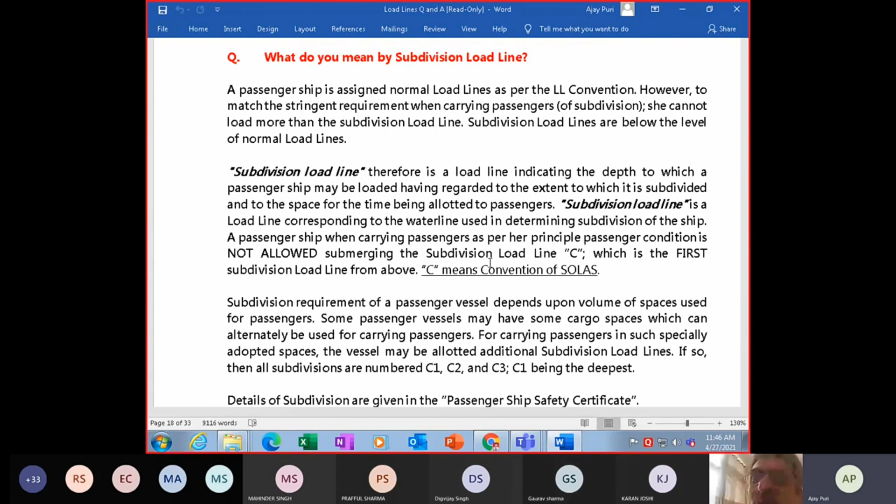So a passenger ship, when carrying passengers as per principal passenger conditions, is not allowed to submerge its subdivision load line C. We're not talking of your load line mark, but the subdivision mark - you can't submerge it. C is the first subdivision load line from above, below that will come C1, C2, C3. At the top will be C, below it C1, C2, C3. Let me first show you what it looks like.

So whenever the question comes, you have to draw the diagram also. This diagram - compared to this, it's not that good a diagram. There's another diagram which I'll show you.

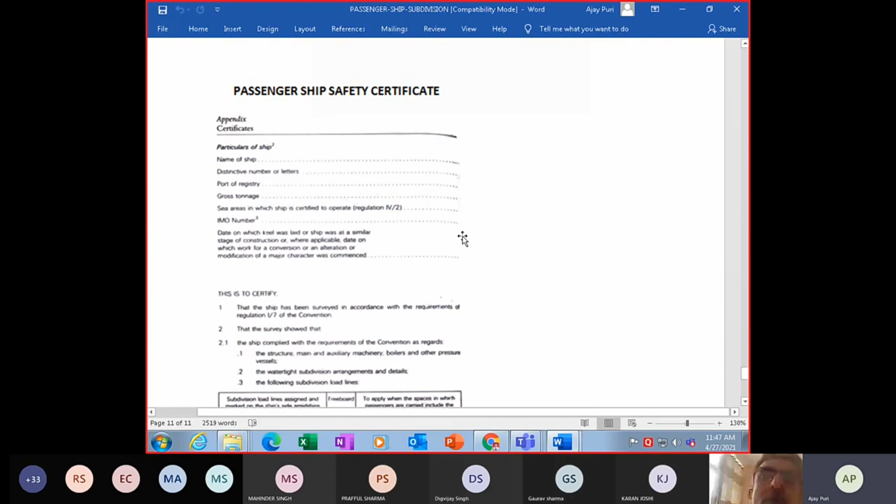These C1, C2 and C - so this is your passenger ship safety certificate basis, that this will be marked C1, C2, C3, subdivision load lines. All this has been sent to you in your notes.

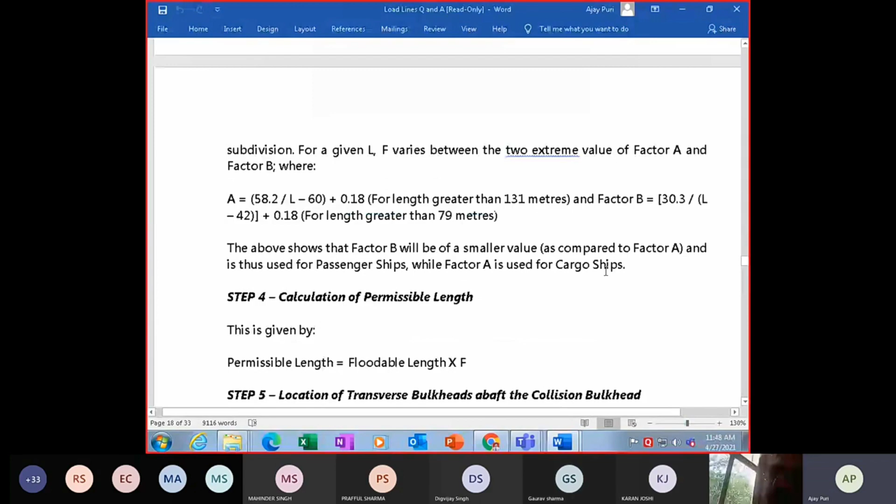Now we come to this and then I'll come back to the other part also. First let me explain in detail how to calculate this.

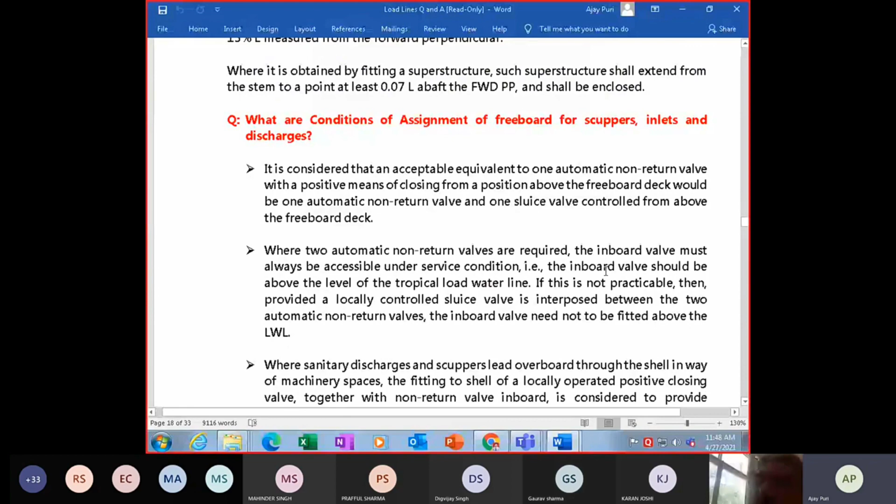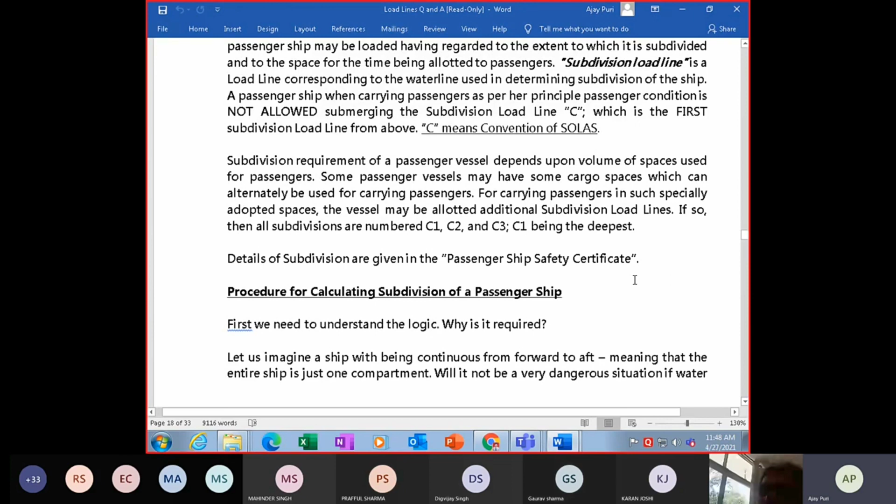So subdivision requirement for passenger ship depends on the volume of space used for passengers. Some passenger vessels may carry cargo spaces which can alternatively be used for carrying passengers. So when you're carrying passengers in such specially adapted spaces, the vessel will be allotted an additional subdivision load line. These subdivision load lines will be C1, C2, C3, and C1 will be the deepest. The details will be given in your passenger ship safety certificate, which I've shown you.

Now, how do you calculate your subdivision for a passenger ship? How many subdivisions should there be? How do you calculate it?

So first you have to understand why it is required. Why is subdivision needed? So that your progressive flooding can be reduced. You have subdivisions - a chemical tanker has 40 tanks, so that means the sinking will be much slower as compared to a bulk carrier which has got 5 holds. Because if the number of subdivisions is less, then the ship is going to sink fast.

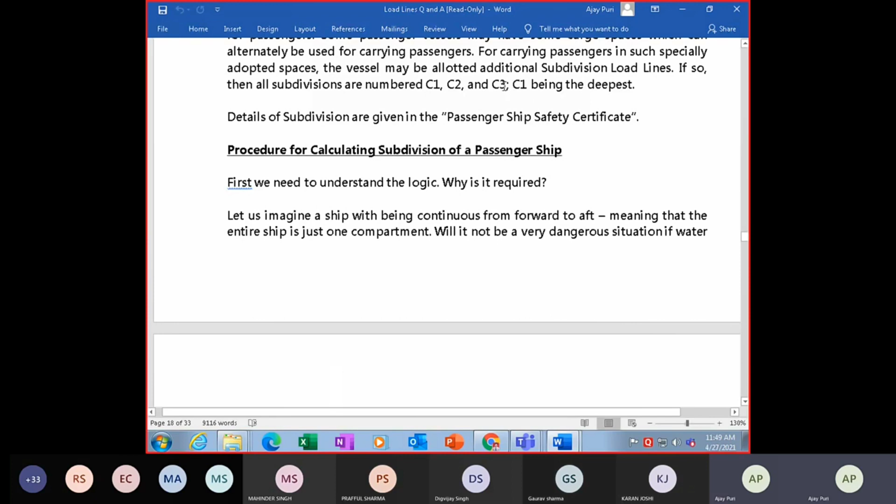So let us imagine a ship which is continuous forward and aft, meaning the entire ship has got only one compartment. Will it not be a dangerous situation if water is entering the hull? One can imagine the loss of stability due to large free surface effect there.

Now, to increase stability, let us divide the ship into two compartments with one watertight bulkhead separating them. So if water was to enter one of the two compartments, the other compartment would continue to provide reserve buoyancy. This means the division of the hull into watertight compartments increases the level of safety, and more compartments means more factor of safety. So here the concept of factor of safety comes into play.

On passenger ships, this level of safety has to be maximum as compared to cargo ships, because the passengers will have more importance. They are more to be concerned with as compared with your cargo.

You can't throw passengers overboard, but you can jettison cargo. You can't jettison passengers in any emergency. Master has the right to jettison cargo if he thinks so, to save the ship, but he can't jettison passengers. So the passenger ship safety is utmost.

So a passenger ship is subdivided into a number of compartments. The number of compartments has to be increased logically. Otherwise, a ship will be like a matchbox which can sink immediately. So the essence of subdivision of a passenger ship is to calculate the number of compartments for its length.

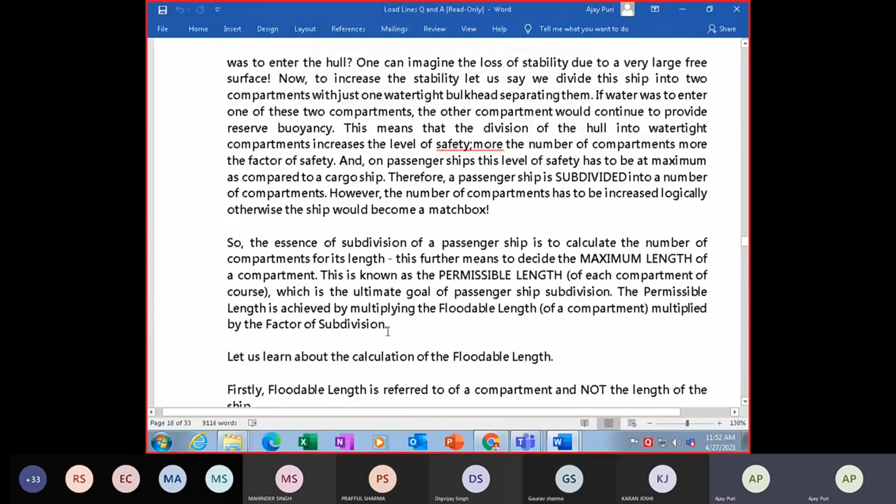Now, how do you find floodable length? Because permissible length, as you know, is achieved by multiplying floodable length by factor of subdivision. So let us learn about the calculation of floodable length.

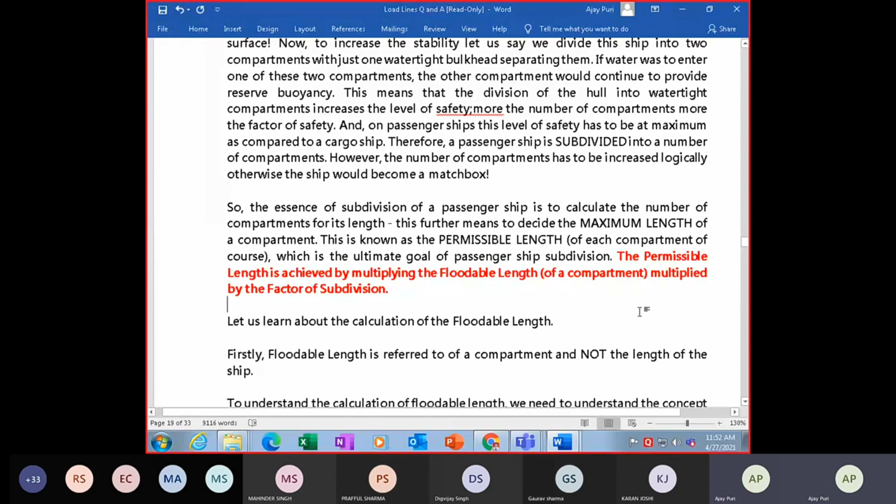Now, floodable length is not the length of any compartment as such, nor is it the length of the ship itself. First you have to understand what is the margin line.

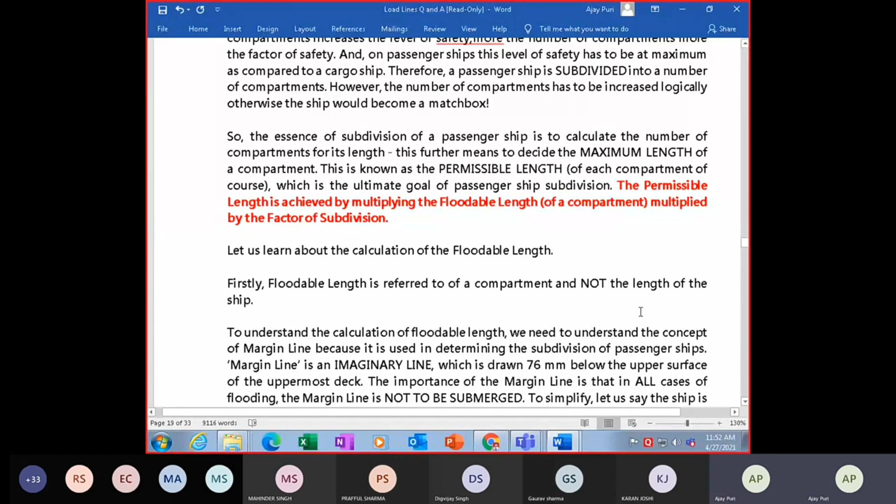Margin line is basically an imaginary line which is 76 millimeters below your bulkhead deck. In any condition of stability, your margin line is not to be submerged. So margin line is that imaginary line all around the ship, below your uppermost continuous deck, to prevent sinking or progressive flooding.

That is 76 mm below, because if it comes above, that means water will enter the openings on the deck. So why is it known as a margin line? It is a margin of safety. That line is a margin of safety.

Let me explain with a diagram here how this is the margin line, and why we consider it the margin line. Then we will come to floodable length, and I'll explain with the diagram what floodable length is. Just by reading out, you will not understand, so let me explain by diagram.

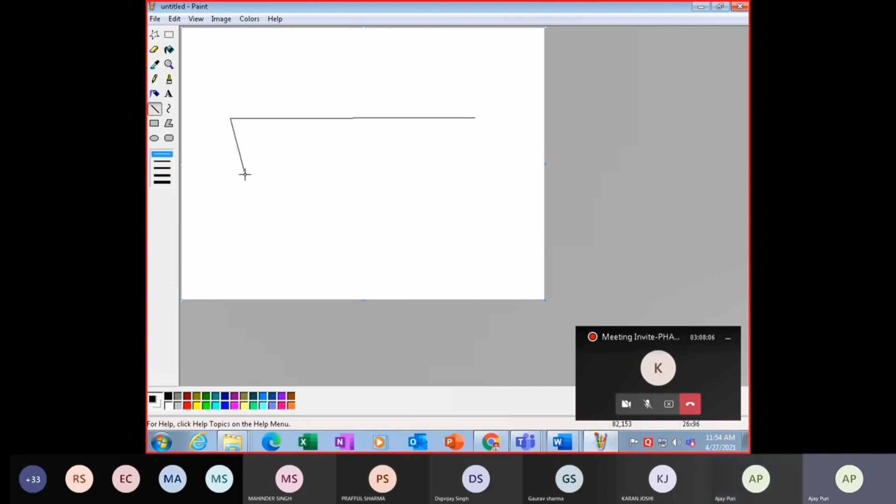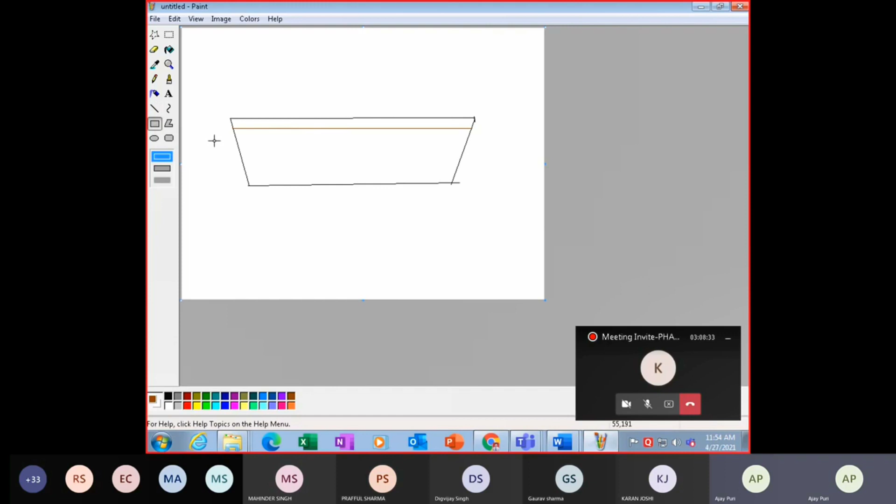Now suppose this is the ship here. If we consider this in any other color, this is the margin line, which is 76 millimeters below your uppermost continuous deck. So this is your margin line. That means in any condition of stability, you should not immerse your margin line.

So now suppose two of your compartments are flooded, you cannot submerge your margin line, which is this line. You can't submerge this margin line. So in any condition of stability, you can't submerge this margin line.

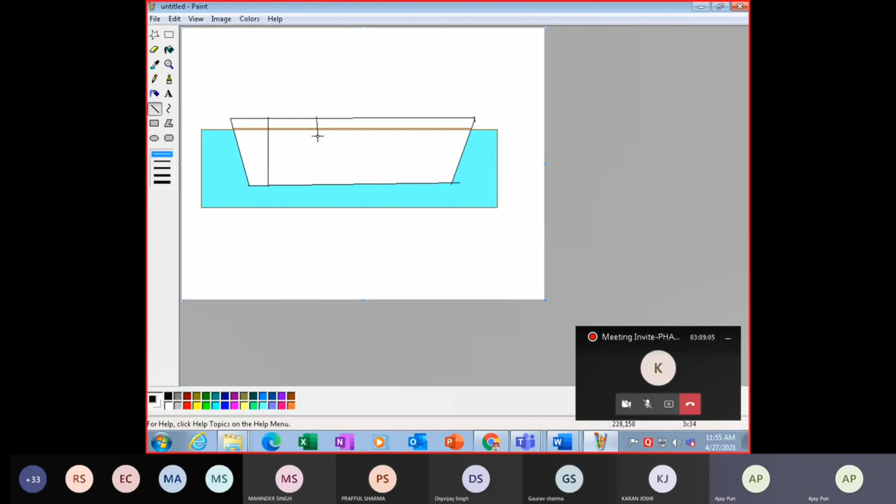So suppose we have made subdivisions like this: one division here, watertight compartment, this is watertight bulkhead here, watertight bulkhead here, watertight bulkhead here, watertight bulkhead here. Now we'll come to floodable length, and from this we'll explain what is floodable length. I'm just leaving this diagram here.

This is your margin line. The vessel should not submerge this margin line in any condition, even if one compartment or two compartments are flooded, this should not submerge. Now we come back to the definition of floodable length. I'll explain with this diagram.

Now to understand the calculation of floodable length, we have to understand the concept of margin line, because it is used for determining the subdivision of passenger ships. So margin line is an imaginary line which is drawn 76 mm below the upper surface of your uppermost deck. The importance of margin line is that in all conditions of flooding, the margin line is not to be submerged.

So this is the main concept, that the margin line cannot be submerged in any condition of flooding. You can't have the margin line submerged, otherwise your ship is going to sink. Now, why is it called a margin line? Because this is the uppermost continuous deck. If I don't have a factor of safety here, then water is going to enter your compartments and sink the ship. So this is a margin of safety, and that's why this line is known as the margin line.

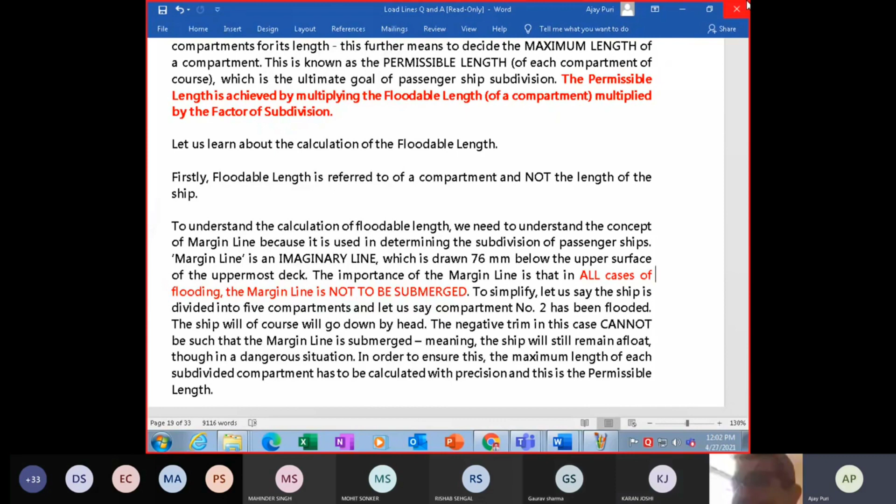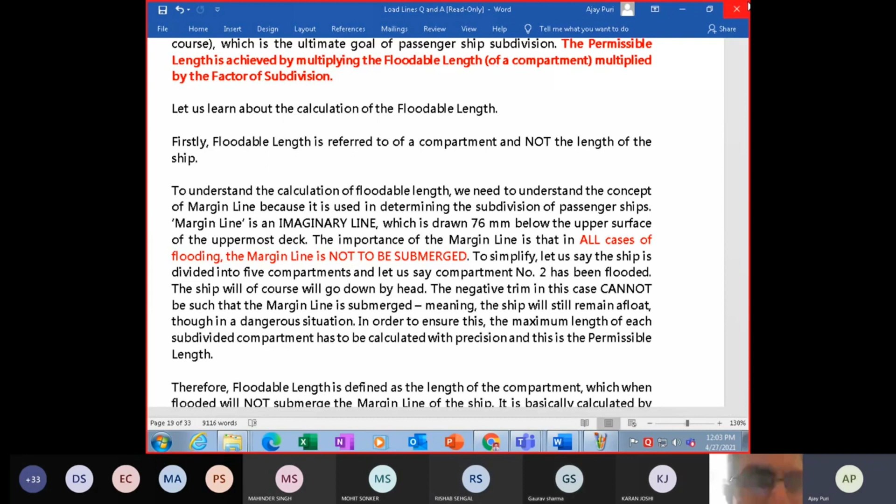सर ये चलो तो फिर बताओ आगे पेपर होंगे कि नहीं होंगे सर। क्या होंगे? पेपर होंगे, क्यों नहीं होंगे, लेकिन हाँ कोरोना का चक्कर अभी हो रहा है, अभी तो होंगे नहीं, अभी सवाल नहीं उठता। तो नोटिस होगा। जो नोटिस आया उसमें बोला कि फर्दर नोटिस तक अब बार बार आपको साइट देखते रहो डीजी की। तो सर आपको लगता है तो होंगे सर?

ऐसा है कि जब तक पूरा वैक्सीनेशन नहीं होगा तब तक तो रिटन नहीं होगा, और ओरल भी नहीं होगा, क्योंकि अभी वेव आ गया तो फिर रुक गया सब। पहले कम हो गए था, वेव आ गया, 3.5 लाख हो रहा है, सो ऑफ कोर्स दे आर गोइंग टू स्टॉप एवरीथिंग ना।

तो शिप पे जाना ही सही है सर फिर तो। वैक्सीनेशन तो साल भर पूरा नहीं होगा। देखो टाइम लगेगा, क्योंकि वैक्सीन इतना है नहीं ना, बिकॉज यूएस ने प्रोक्योर करके बैठ गया सारा, 70 मिलियन से ज्यादा तो वो लेके बैठ गया, और वो इंडिया को कौन सा देगा? जो वो रिजेक्ट कर रहा है वो इंडिया को दे देगा।

अस्त्रा वाला जो रिजेक्टेड है वो इंडिया को देगा, और इंडिया रिजेक्टेड माल चलाएगा सब पे, और क्या। और फिर सबको कोरोना होगा, और क्या, जो बच गए वो भी हो जाएगा कोरोना। जो लगवाएगा उसको कोरोना हो जाएगा, और क्या।

चलो पढ़ाई करते हैं यार, वो कोरोना कोरोना देख के तो मुश्किल हो जाता है, इसलिए साइड छोड़ दो उसकी, पढ़ाई करो बस।

So margin line basically we can't submerge. If the margin line gets submerged, the probability of sinking becomes more. So let us say the ship is divided into 5 compartments, and let's say compartment number 2 is flooded. The ship will go down by head.

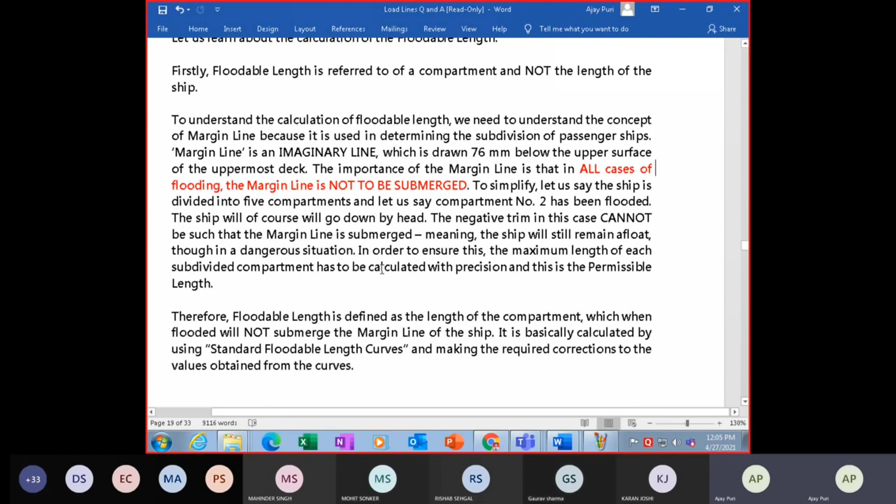So with the negative trim, you cannot have the margin line submerged. So that means your ship is going to float. However, the dangerous situation, in order to this, will be dangerous. So in order to ensure that, the maximum length of each subdivided compartment has to be calculated with precision, you have to know the permissible length.

So now what is your floodable length? Floodable length is defined as the length of the compartment which, when flooded, will not submerge the margin line of the ship. So here you have to calculate by standard floodable length curves, and you require to make your corrections from the value of the curve. So this will be in your stability, the standard floodable length curves you have to require for making your floodable length calculation.

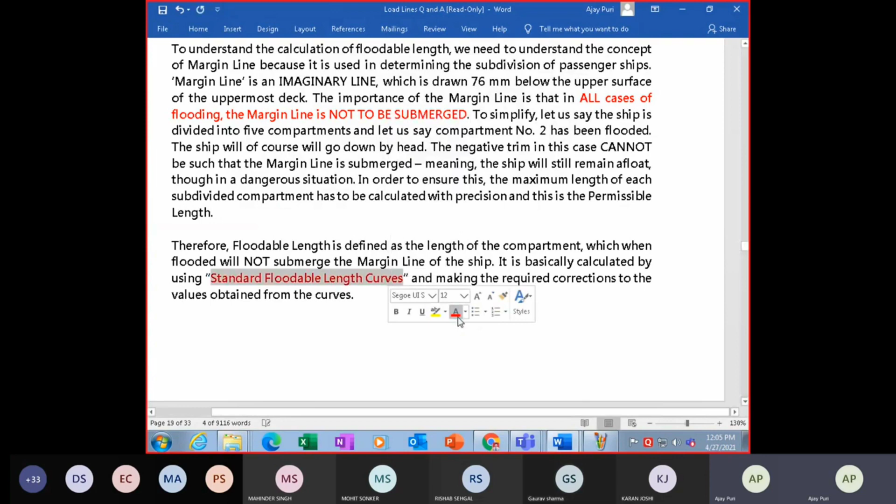अब इसको जरा explain करते हैं diagram से, कैसे होता है, why and how your floodable length is calculated. Now if you see this, इसको मिटा देते हैं हम, and now we come to what is the floodable length, how your margin line is not to be submerged, कौन सा length है जहां वो submerged नहीं हो रहा।

Suppose the ship has gone down by head. I suppose your sea is like this box, and the ship has gone down, gone down by head now like this.

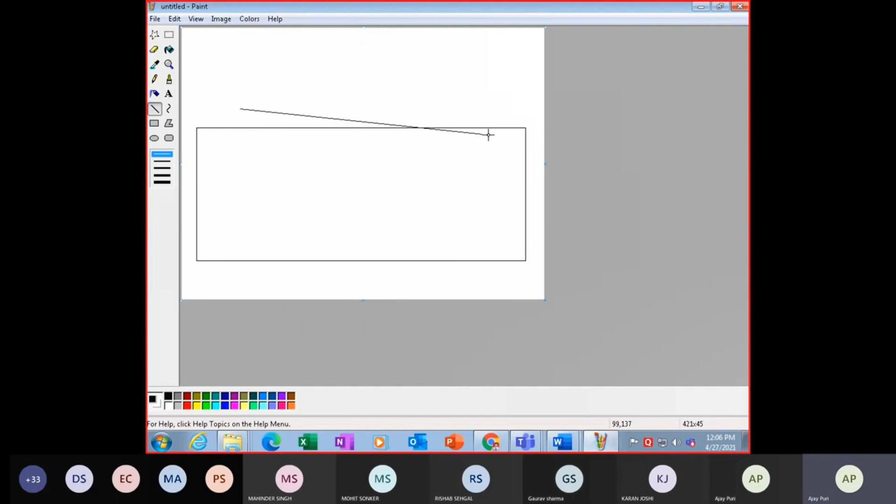This is a fictitious example I'm making to explain the concept. Now this is your margin line, okay?

Now what is the floodable length? The floodable length is where your margin line should not submerge, but here it did submerge. So suppose a floodable length is without submerging your margin line. Now this margin line submerged, if it doesn't submerge, whatever is left, that is the floodable length. So suppose this is a compartment, the floodable length is this much, which will not submerge the margin line. That is the floodable length, because you're calculating what is the permissible length, basically what is the length of compartment. But floodable length is where your margin line will not submerge.

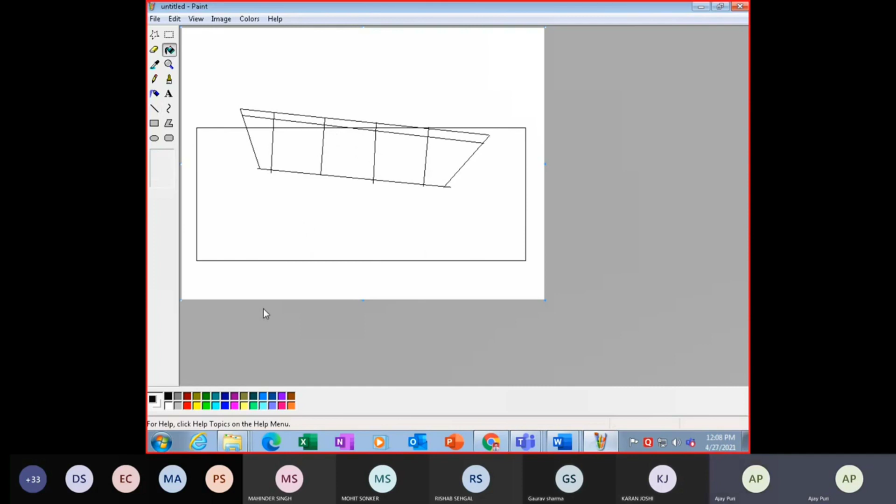Now in this compartment is flooded, this section which is left which is not submerging your margin line, that is your floodable length. This is your floodable length. So in case your compartment is flooded, this section is not being immersed into the water, that is your margin line is not getting immersed in this section, that is your floodable length.

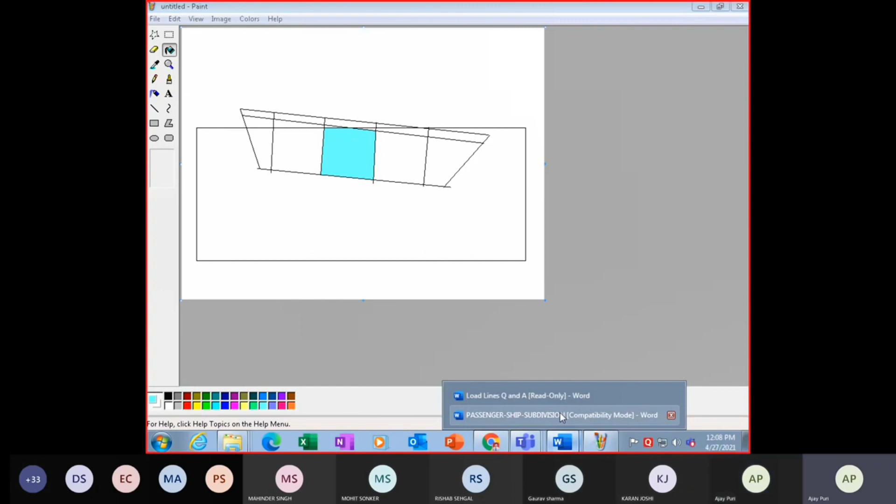So the floodable length is defined as the length of the compartment which will not submerge the margin line of the ship. So how much section is there which does not submerge the margin line, that is the length of compartment. And you will calculate this with your standard floodable length curves which are given in your stability booklet.

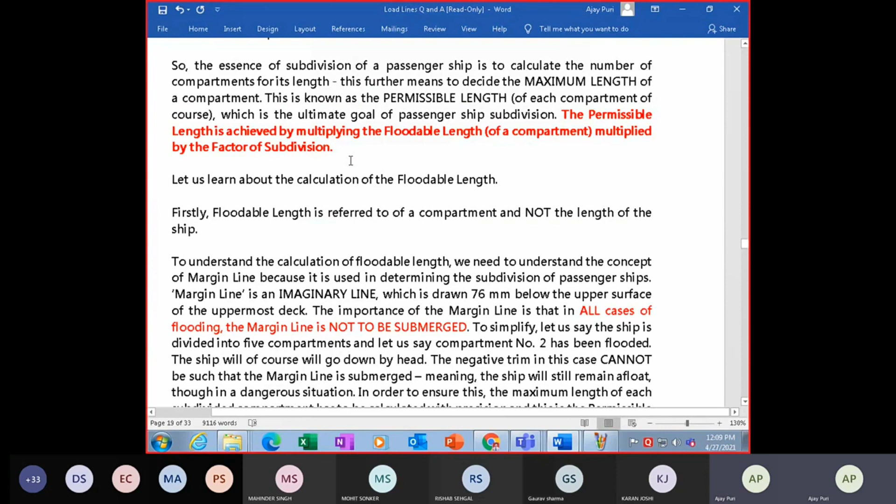And what will be the permissible length? So permissible length will be floodable length of a compartment multiplied by factor of subdivision. And floodable length is the length of compartment which when flooded will not submerge the margin line of ship. So if we made the compartment smaller, that will be the length of compartment which is not flooding, or which is not submerging the margin line.

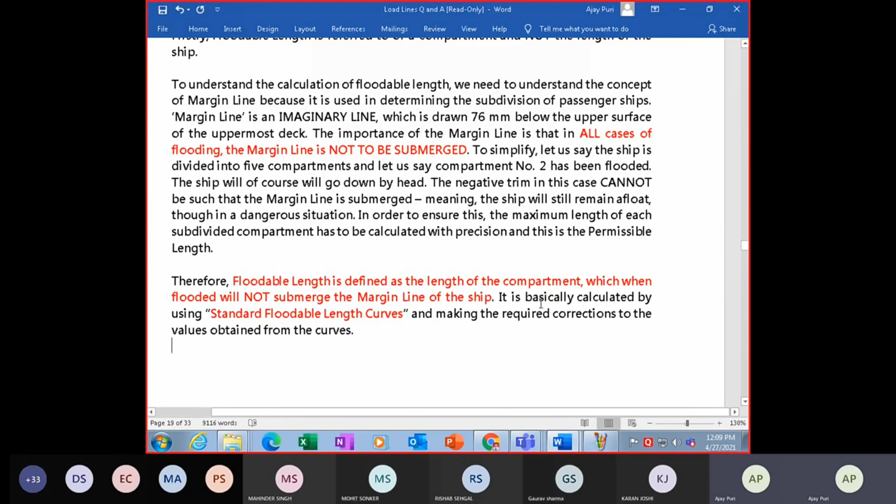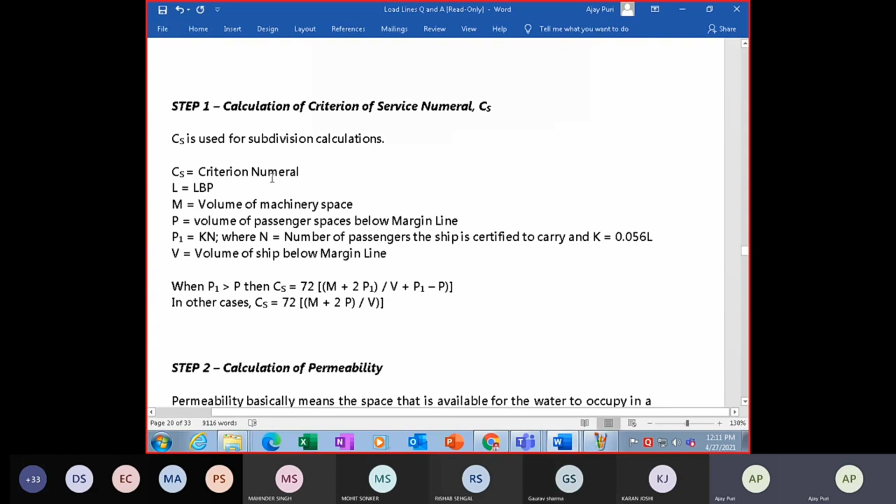In all other cases, when P1 is not greater than P or equal to P, so where P1 is less than or equal to P, then CS is equal to M plus 2P divided by V, because P1 is less than or equal to P, so we have to remove P1 there. So this formula you have to see for CS, that is your criterion for subdivision calculation, that is your criterion numeral.

Now, how do you calculate permeability of a compartment? So permeability is what? Let's highlight its definition. Permeability is a space that is available for water to occupy when your compartment is flooding. So we take the engine room's space permeability as 85% because 15% is occupied by the machinery. So the water that will enter will be 85%.

So for instance, the permeability of machinery space is taken as 85. This means in case of flooding of machinery space, maximum 85% of volume of the space will be taken by water, and the remaining 15% will be occupied by the machinery. So for convenience, a uniform average permeability or UAP is used for each of the following sections of hull. For your machinery space, uniform average permeability is 85 plus 10 into A minus C divided by V.

A is equal to volume of passengers below the margin line but within your machinery space. C is the volume of space below tween deck used for cargo, but within machinery space, because we are calculating the permeability of machinery space. So I have a uniform average permeability basis for machinery spaces, and V is the total volume of machinery space below margin line. So UAP is equal to 85 plus 10 into A minus C divided by V.

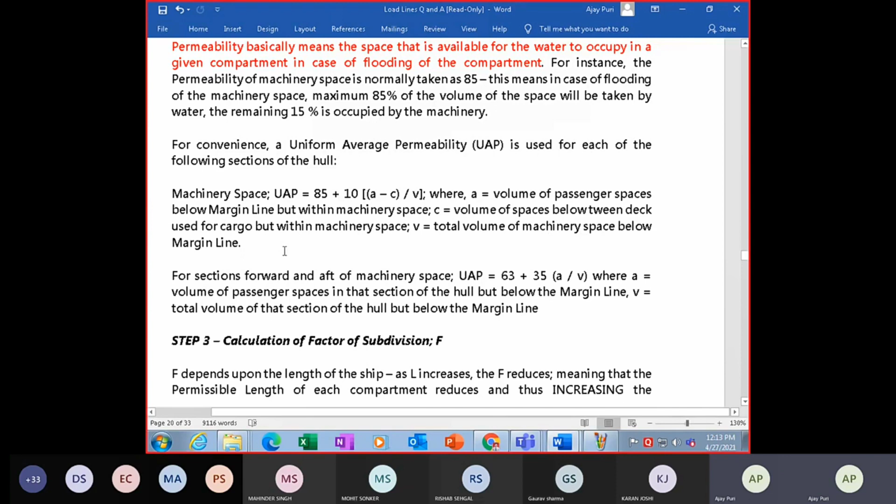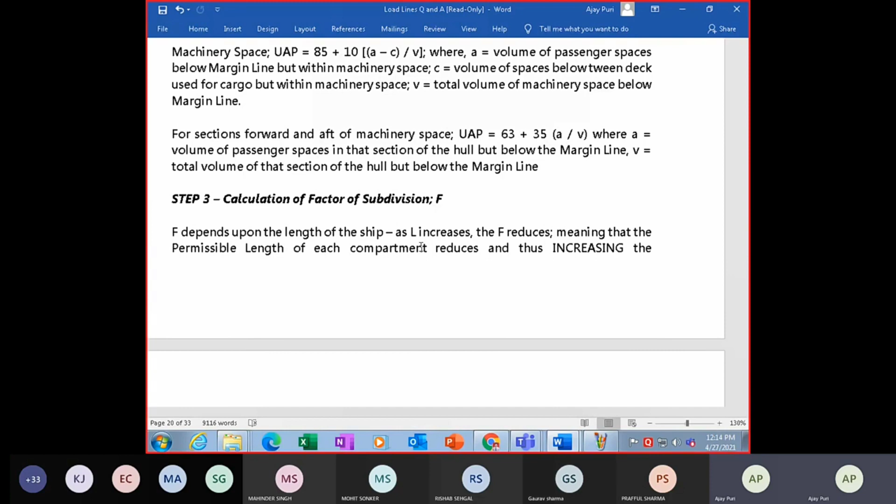Now for calculation of factor of subdivision: if the length of the ship is increased, the factor of subdivision reduces. That means the permissible length of each compartment will reduce because your number of subdivisions is increasing. So the permissible length of each compartment will reduce, and that will increase your subdivision. So the number of subdivisions will increase based on length, meaning the permissible length of compartment will decrease.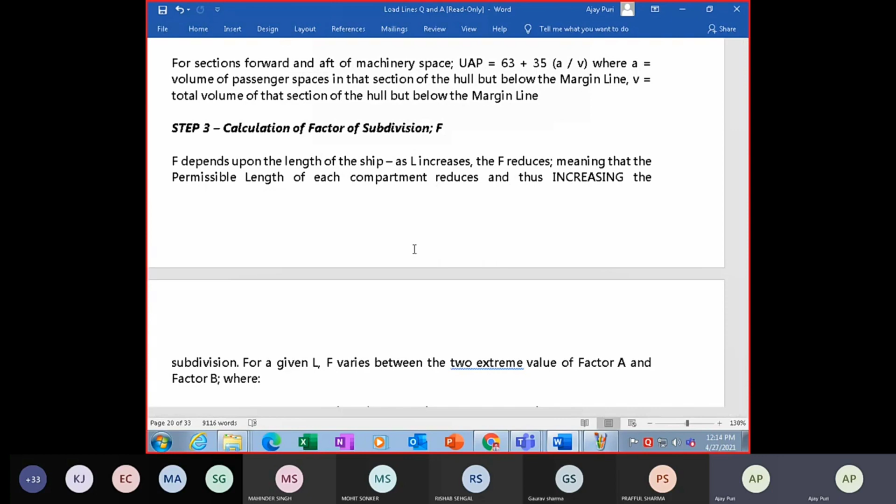So your factor of subdivision depends between two extremes, factor A and factor B. Factor A is 58.2 divided by L minus 60, plus 0.18, for lengths greater than 131 meters. Factor B is 30.3 divided by L minus 42, plus 0.18, for lengths greater than 79 meters.

Factor B will be of smaller value as compared to factor A, and therefore it is used for passenger ships, while factor A is used for cargo ships. So this factor is used for cargo ships, and factor B is used for passenger ships. This is cargo ship, this is passenger ship, because this is a smaller value as compared to A.

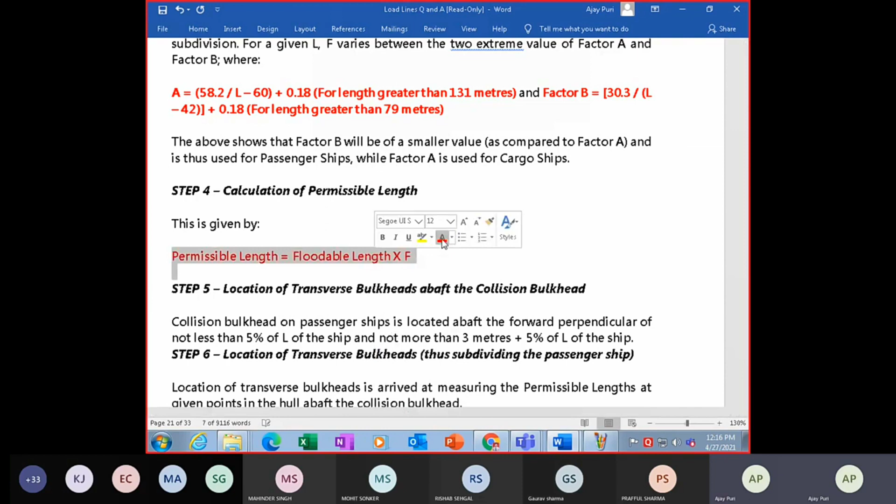Now, how do you calculate your permissible length? Permissible length is floodable length into F, the factor of subdivision. So you have to see where your transverse bulkhead is abaft your collision bulkhead. The collision bulkhead on a passenger ship is located abaft the forward perpendicular, not less than 5% of the ship's length, not more than 3 meters plus 5% of L of the ship.

On other ships, it is 5 to 7.5% of the length of the ship, but on a passenger ship it is not less than 5% length of the ship and not more than 3 plus 5% of length of the ship.

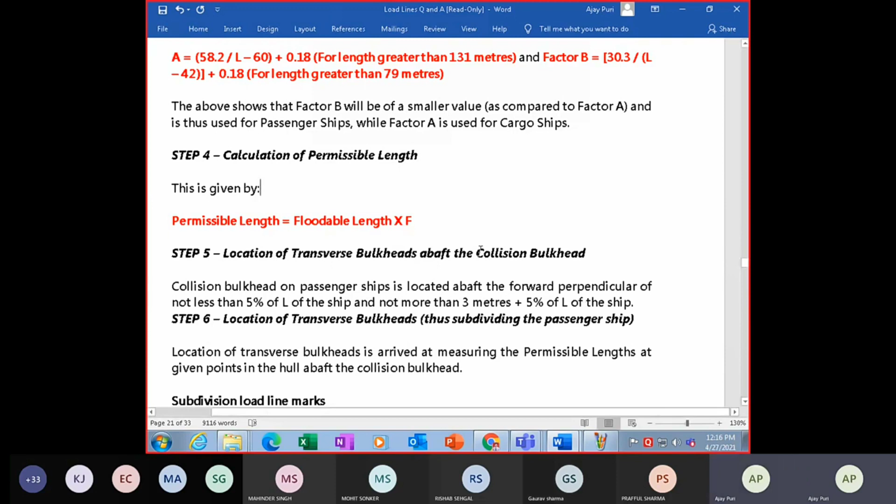The location of the transverse bulkhead dividing a passenger ship is arrived at by measuring your permissible length at given points on the hull abaft your collision bulkhead. So where are your transverse bulkheads located? That will be based on your permissible length aft of your forward collision bulkhead.

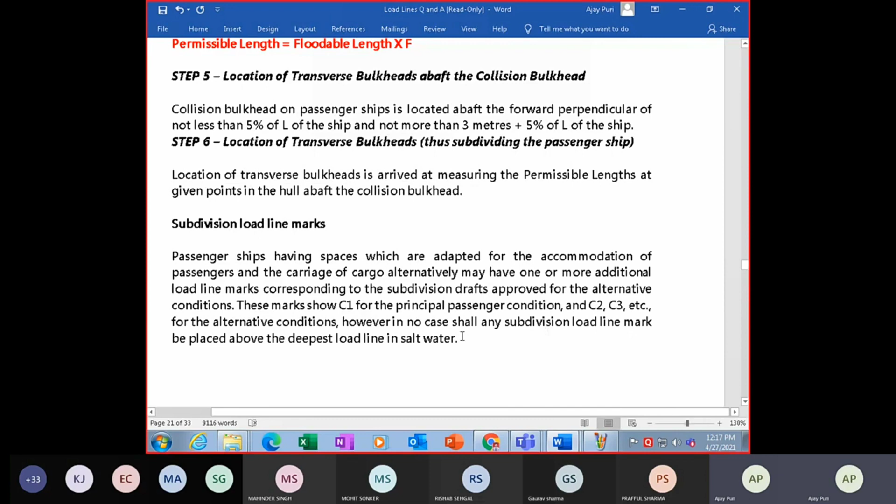So passenger ships have spaces adapted for accommodation of passengers and carriage of cargo, and may alternatively have one or more additional load line marks corresponding to subdivision draft approved for alternative conditions. So C1 is for the principal passenger ship condition, while C2, C3 are alternative conditions. However, in no case shall any subdivision load line be placed above the deepest load line in salt water - they should all be below that. So C1 to C2 will be below your winter load line mark. So that is your subdivision.

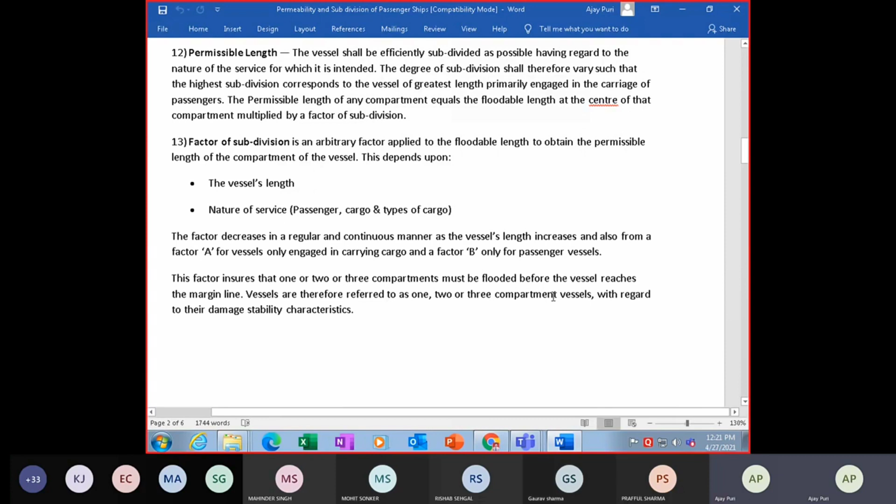So factor of subdivision depends on the ship's length and nature of service. The factor decreases in a regular and continuous manner as the vessel's length increases, and also from a factor A for vessels engaged in carrying cargo and factor B for passenger vessels. The factor ensures that one, two or three compartments must be flooded before the vessel reaches the margin line, and the vessel will therefore be referred to as a one, two or three compartment vessel with regards to damage stability characteristics.

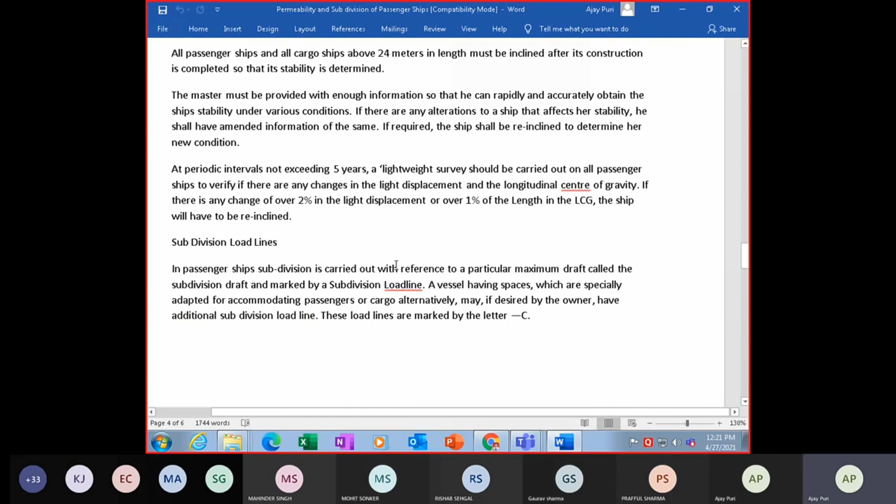So C1 is principally for passenger carriers, C2 is passengers in tween decks, and C3 is for lower deck carrier. Details of the load lines are recorded in the passenger ship safety certificate, together with the spaces used alternatively for passengers or cargo.

So the deepest subdivision mark cannot be above the deepest salt water load line. If, however, your subdivision line is above the appropriate international load line for a particular locality and season. If it is there, the international load lines will apply, not C1 C2. At no stage in salt water should the appropriate subdivision load line be submerged.

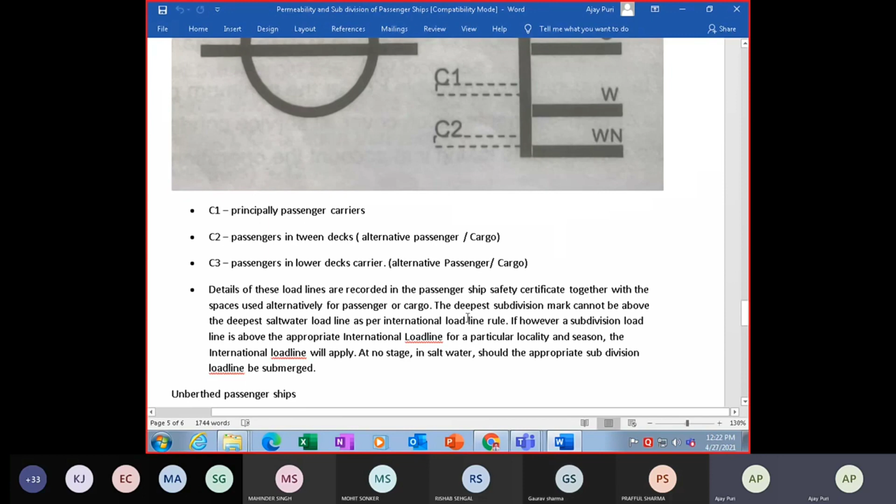अब इधर में स्पेशल ट्रेड के बारे में, एक और आपके D1 D2 भी आया था। during your unberthed passengers who didn't stay in berths but stayed on deck, for them they had D1, D2 and D3 for Hajj pilgrims, and these had greater freeboard than C lines.

So these were known as special trade passenger vessels. So in special trade passenger vessels, you had D1 D2 D3 which had more freeboard than your C1 C2 C3. So during the Shimla Convention in 1931, due attention was given to special trade passenger vessels

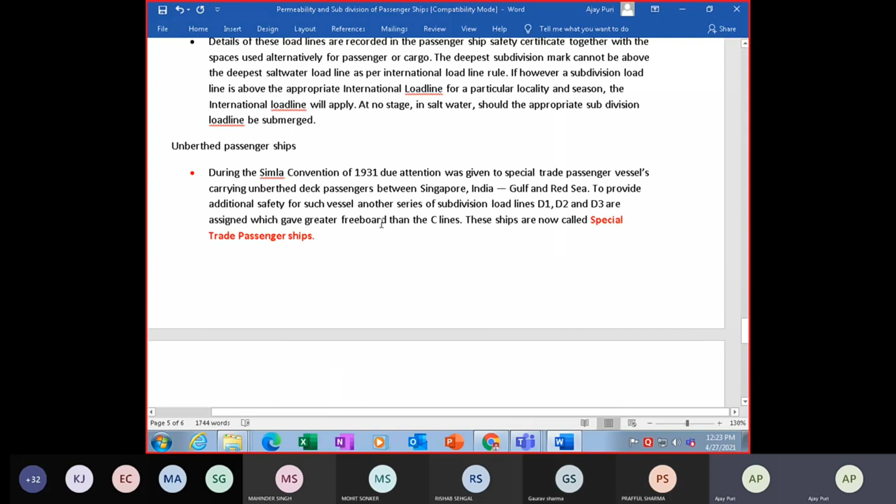carrying unberthed deck passengers between Singapore, India, Gulf and Red Sea, and to provide additional safety of these vessels, another set of subdivision load lines were there, which were D1, D2, D3, which were assigned to give a greater freeboard than the C lines. So these were for special trade passenger vessels.

यही आपको बताना था उनके लिए क्या है। That is for unberthed passenger ships.

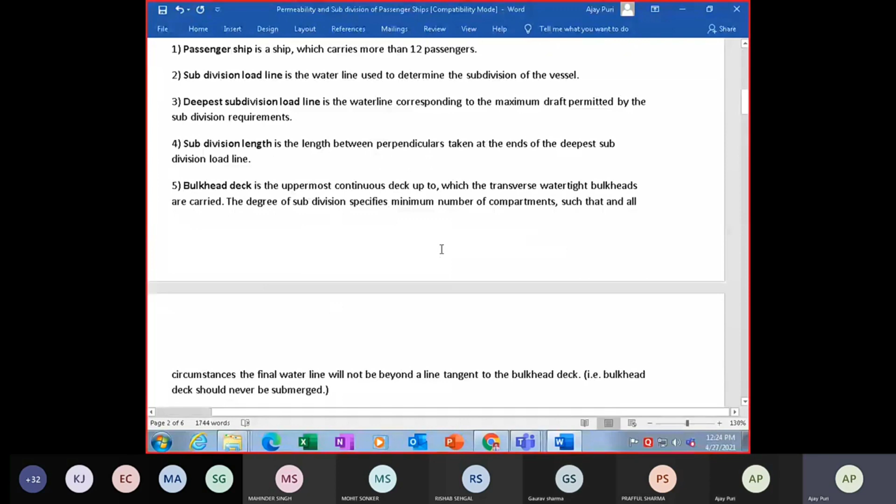फिर आया था 16 के सब डिविजन और स्टेबिलिटी क्राइटेरिया क्या है, ये क्वेश्चन last time आया था। So I've sent you notes.

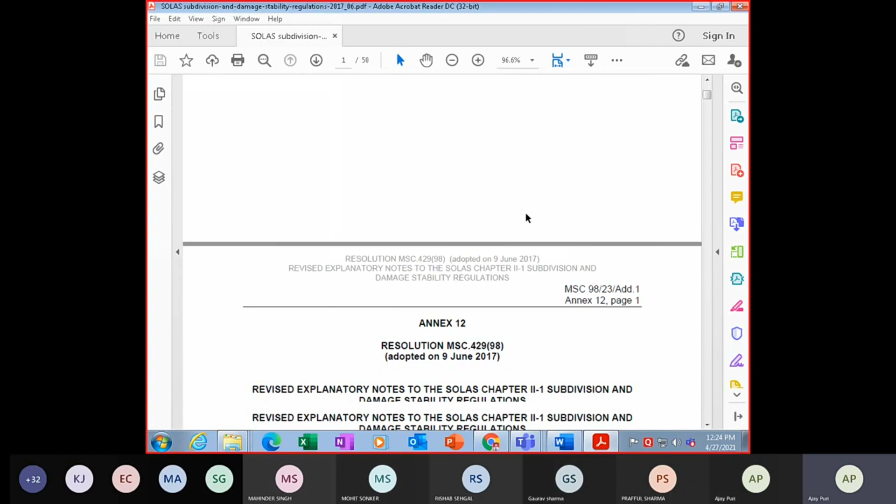So this was MSC Circular in 2017, revised explanatory notes to SOLAS chapter 2-1 subdivision and damage stability regulations. So we will not do damage stability here, सब्डिविज़न का check करते हैं।

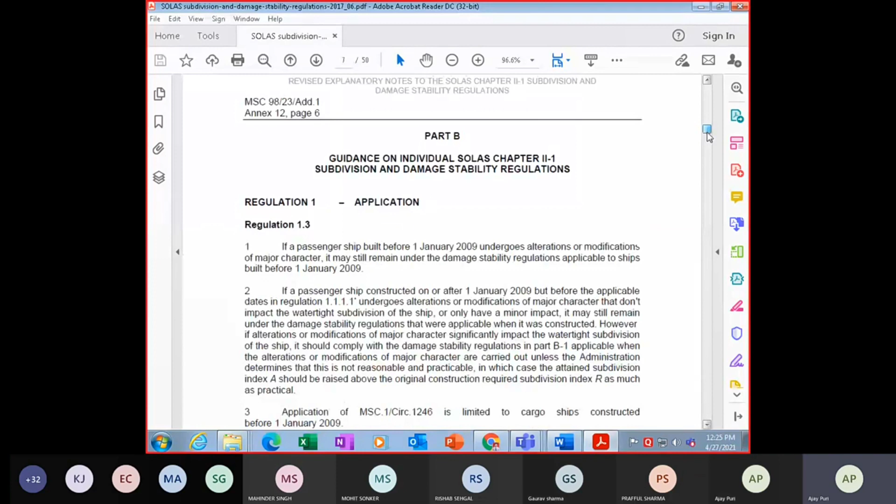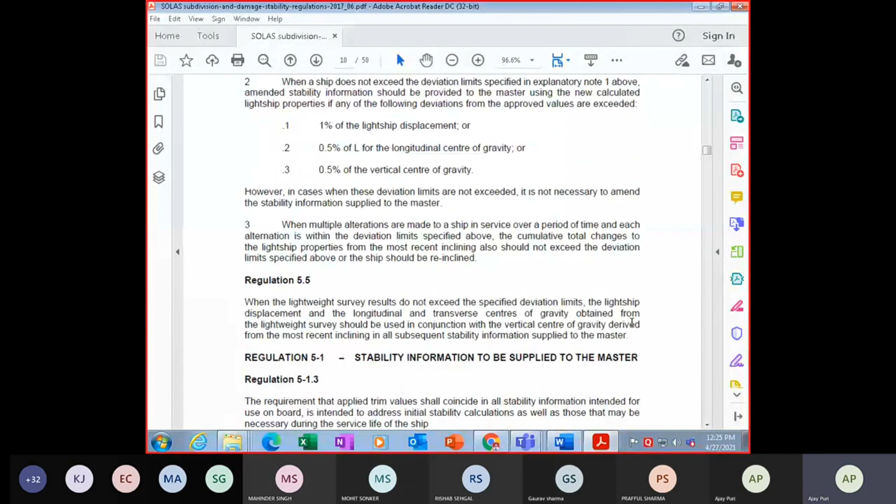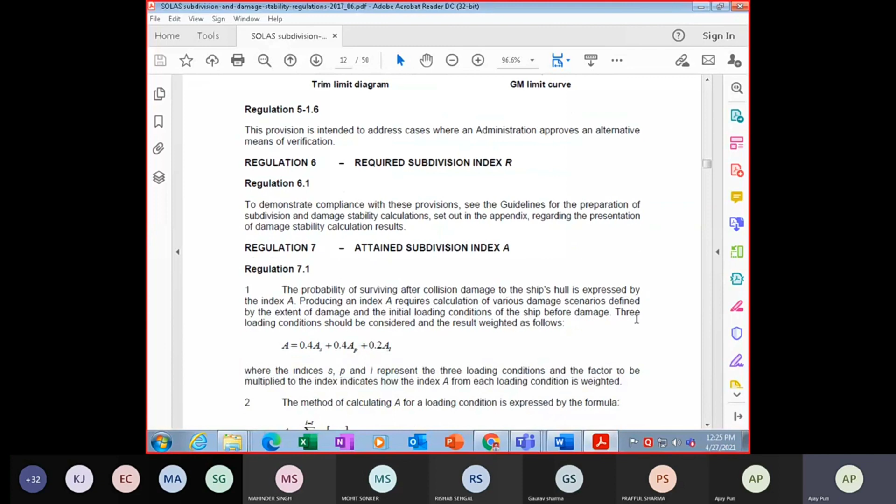Let it come down. So that's your required subdivision index R. ये सब तो करने की जरूरत नहीं है।

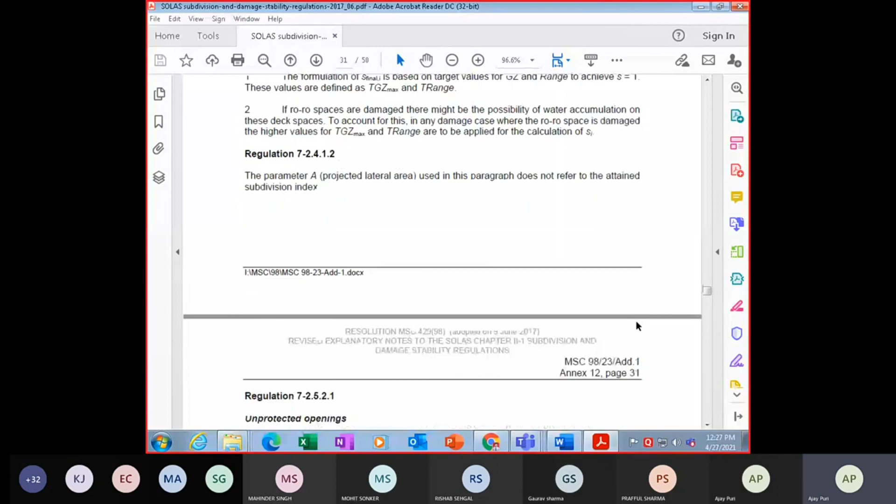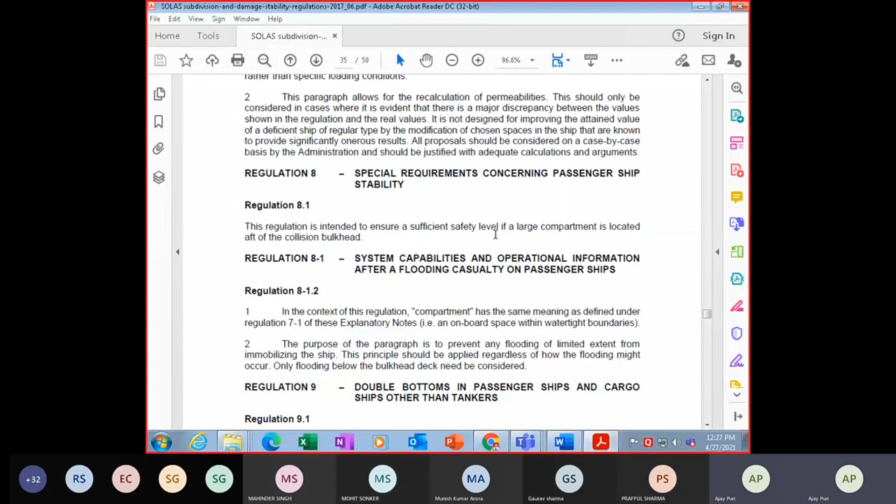Now comes your stability requirements of passenger ship. Sufficient safety level, large compartment located aft of your collision bulkhead. Now double bottoms के बारे में दिया है।

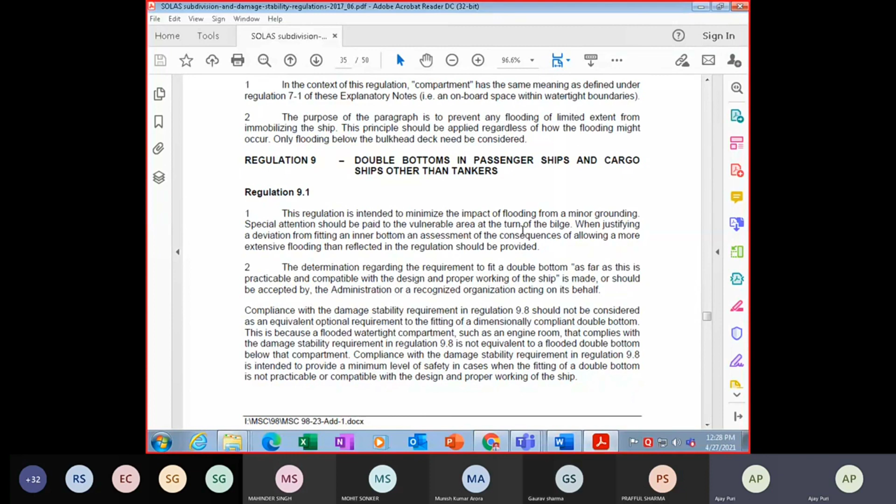This is to minimize the impact of flooding from minor grounding. Special attention to be paid to vulnerable area at the turn of the bilge. DBs in passenger ship and cargo ship other than tankers.

The Ro-Ro ship, so construction of watertight bulkheads, shaft tunnel.

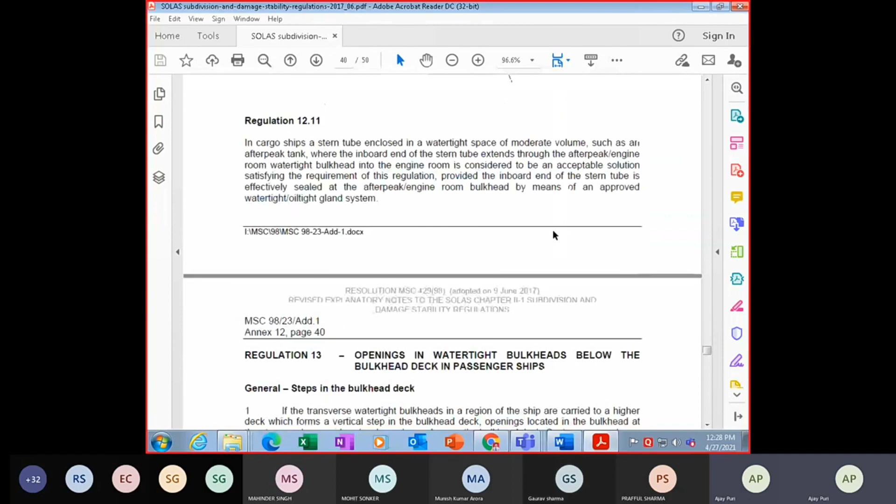तो फिर आपको इसका पढ़ने की जरूरत नहीं है। जो पढ़ा है बस वही है, ये सब पढ़ने की जरूरत नहीं है।

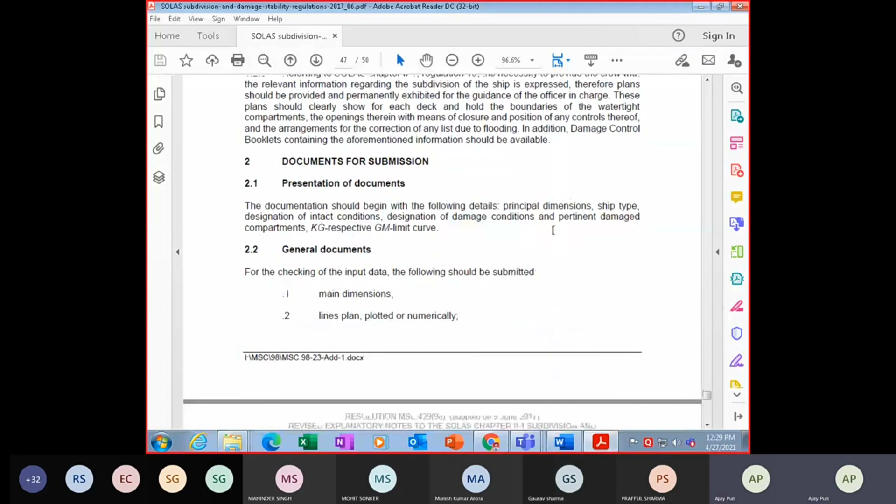Don't have to worry about anything more. D1, D2, D3 भी करा दिया, that is for special trade passenger vessels.

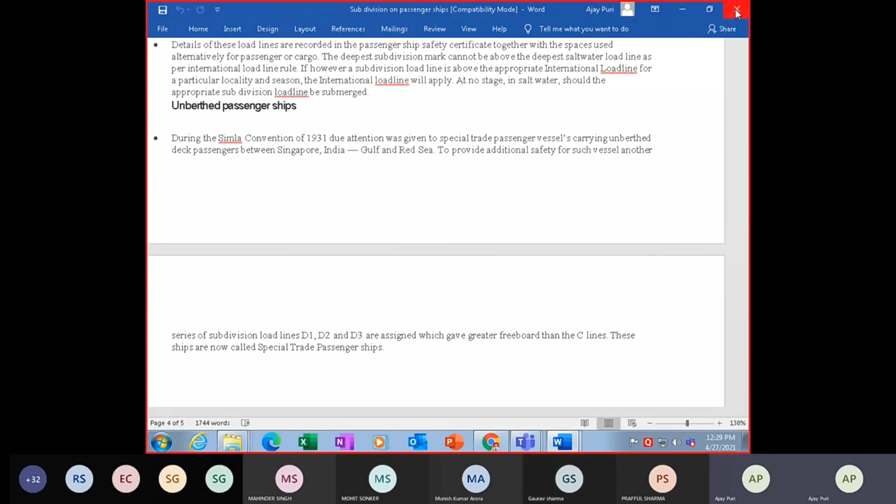ये सब भी आपको भेजा हुआ है। ये तो करा दिया already, D1 D2 D3 कर दिया। ठीक है, फिर आपका load line is done and your passenger ship's subdivision is also done.